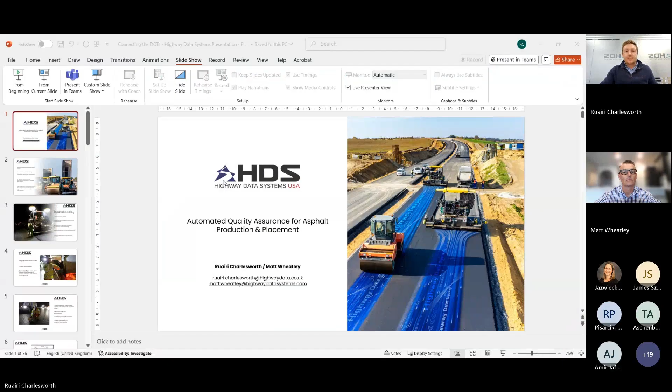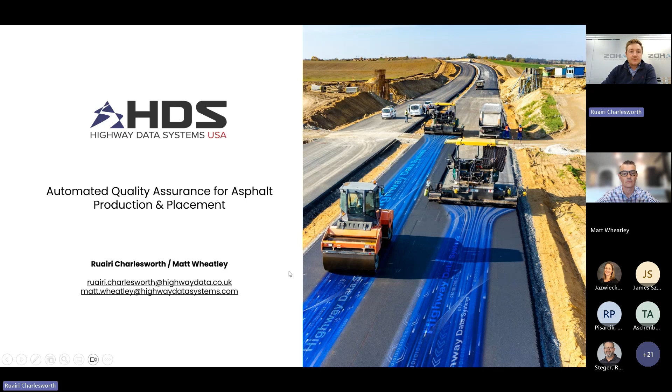The company that I work for, Highway Data Systems, we're going to be talking about automated quality assurance for asphalt production and placement. So first of all, just a little bit of background about us. As you can probably tell, I am not an American. We started up in the UK, where we are a UKAS accredited materials testing house. What that means is UK accreditation service. So we are all from a technical materials testing background. I myself started off as a technician when I was about 18. I've been in the lab, I've been out on site. I'm quite pleased to say that now I spend most of my time in an office, so it's a bit cleaner. But the background really is materials testing.

So rather than being a technology company that's come into the industry and trying to apply technological solutions to the industry, we're very much from the industry and have identified ways to use technology to improve processes. So we operate our hardware and software that we design in-house as a service for contractors. And we have 46 squads and 16 plants. I think actually that number might be a little bit out of date. Matt will probably explain to you how many we've got going in the US, but operating with our technology across the UK, Ireland, and the USA. And we are the sole provider of this technology on frameworks, including Transport Scotland, National Highways, and Europe's biggest airport, which is Heathrow Airport.

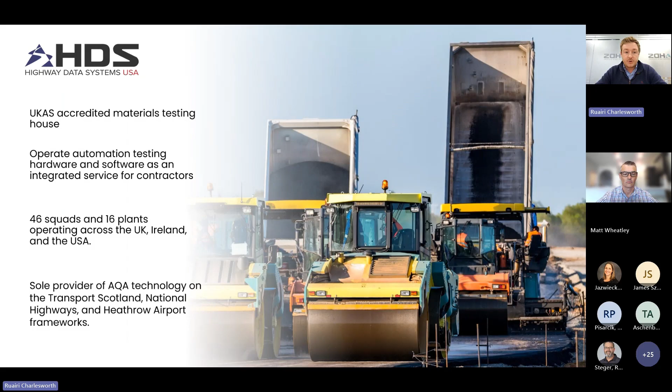So here are some of the issues that we identified as requiring improvement in the asphalt construction industry. The first is health and safety. There are many and significant health and safety risks with doing anything on site, as we all know, and any opportunity to use technology to avoid that is a pretty self-evident benefit. From a technical point of view, we think that because of the way that quality assurance is done, it's often done after construction, and that means that there's a limited opportunity to fix problems before they become permanent. I'll get on to talking about compaction testing in a minute, but that's a pretty good example. And anybody who's worked in the industry for any amount of time will know that there is often a limited degree of communication between asphalt production parts of the business and asphalt contracting, and that causes issues. And it has negative impacts on quality assurance. So we really thought that was a good area to look at for improvement.

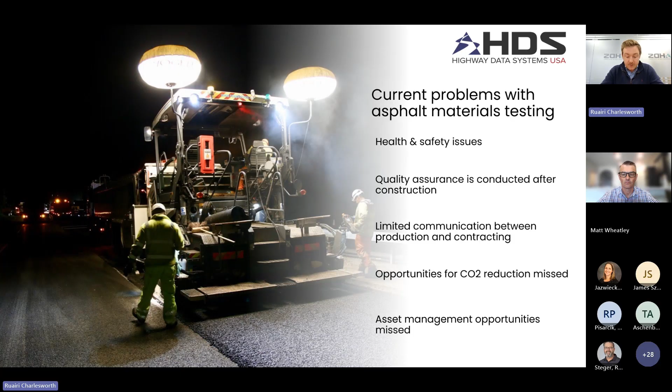Next, opportunities for CO2 reduction. It's a very important topic. Everyone across the industry is trying to do everything they can, but there are some opportunities being missed by the lack of sophisticated technology being used during particularly the asphalt production process. And then finally, one of the issues that we identified is that none of the data that we use in construction quality assurance tends to be used during asset management. And we think that it stands to reason that if you know more about how the road is constructed, it should help improve your understanding of how the road will perform during its life cycle. So those are some background things that we wanted to try and improve on. In some more detail, this happens on networks around the world day in, day out, and it's capturing material delivery temperatures.

If you're sticking your hand into very hot asphalt around moving machinery, not only are you likely to be capturing only a couple of data points, maybe the material will tend to be cooler at the back of the truck, but you're putting yourself into danger.

And if you think about all of the operations that technicians have to do around the paver, whether it's rolling temperatures behind the back of the paver, mat temperatures, delivery temperatures, creating construction records based off ticket information, it's actually quite difficult for that technician to keep up and record all that information diligently and accurately. So we think there's some opportunities for improvement around those processes.

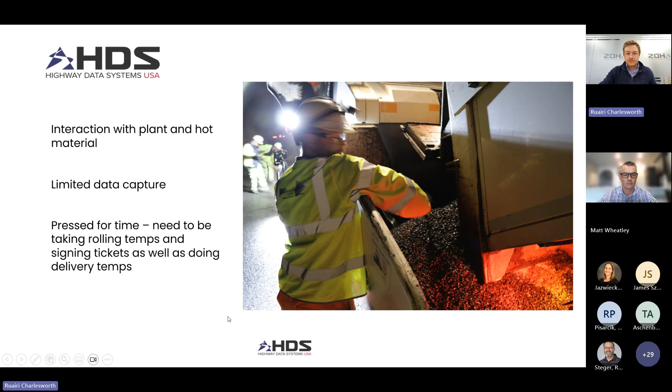Secondly, compaction testing. So first of all, I've got to say that we don't think that density gauges are especially reliable. We've done a fair amount of correlation work, and we think that they are more affected by things like temperature than may often be acknowledged.

But from a practical point of view, this is normally done after the construction's finished. The guy drops back after laying X number of tons of base or binder, and the material is going to have cooled significantly by the point at which the testing's done. And that means if you find that some of the material is out of spec, then unlucky really, because there's not much you can do about it at that point.

The accuracy of density correlations is variable. I think particularly with increasing amounts of RAP going into mixes, we think that basically there's opportunity for doing compaction testing in a better way, basically through the use of technology.

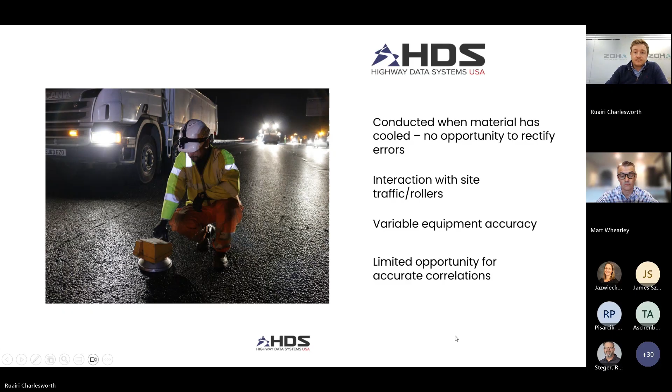And finally, the data. The way that we collect quality assurance data at the moment is pretty old-fashioned. It means that the resulting reports that you get out of it tend to be siloed. There's not much opportunity for doing big data analysis. They don't tell you much about the project progression, and they tend to be chainage referenced, which means that the data doesn't upload nicely into GIS visualization platforms.

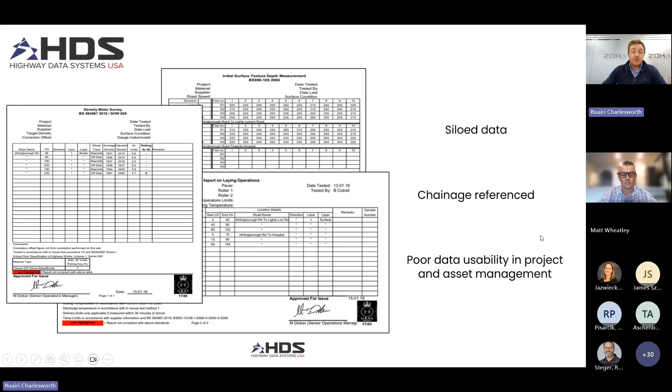So I'm sure I'm not telling you anything that you don't know already, but it's just good to start off by explaining what problems we're trying to overcome with our approach to quality assurance.

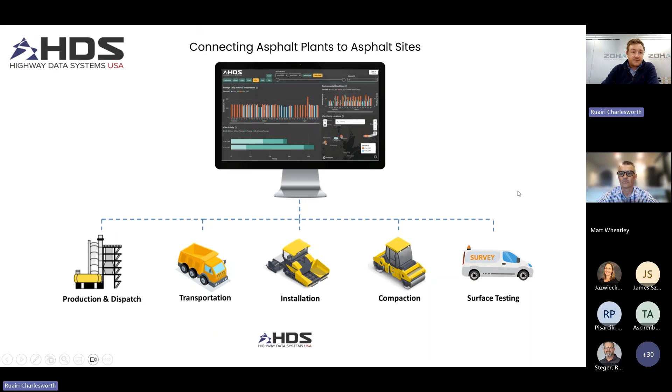And the next couple of slides and the technologies that I'm going to show you have been developed in conjunction with different stakeholders here in Texas in response to their industry needs and requests. And maybe before we get into it, a good analogy for these technologies is how behavior changed within your organization if and when you introduced dash cams to your company's vehicles, because it's a similar effect. When there is visibility of data, behavior may and often does change.

But the first thing we're going to look at is what we term our e-plant system. And as you can see, this is a real install at a plant in Texas. We have an infrared sensor that records material at the drag slat as material is produced. It measures the temperature as the material leaves the drum before it is transported to the storage silos. And we use cellular or Starlink to send the data off site, and the operator is provided with a tablet in his or her control room to view live data of the temperature of the material they're making. Go to the next slide, please, Ruairi.

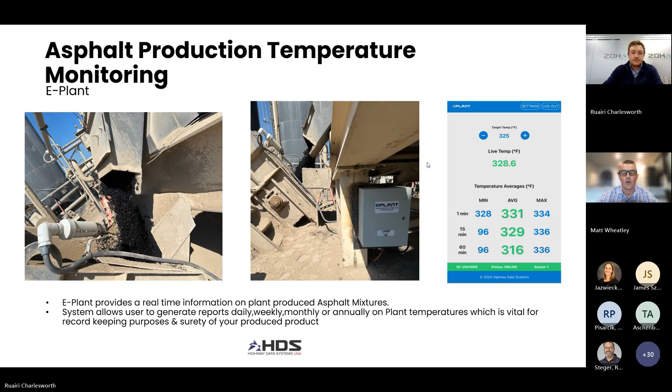The next technology that we developed, again in conjunction with industry, was what we term our e-silo system, where we mount infrared sensors underneath the eaves of the silos. As the silo door opens and material is released, we capture the temperature of the material. We then tie that to the loadout ticket and report this information in real time for the plant operators and owners.

We also store this data in case of emergency. And the slide that you're seeing here, the red circles are the infrared sensors that are underneath the eaves of the silos. And as you can see, our control box is magnetically mounted, and the silo sensors are fed to this box. And again, we use either cellular or Starlink to send the information off of site.

Could I have the next slide, please, Rory?

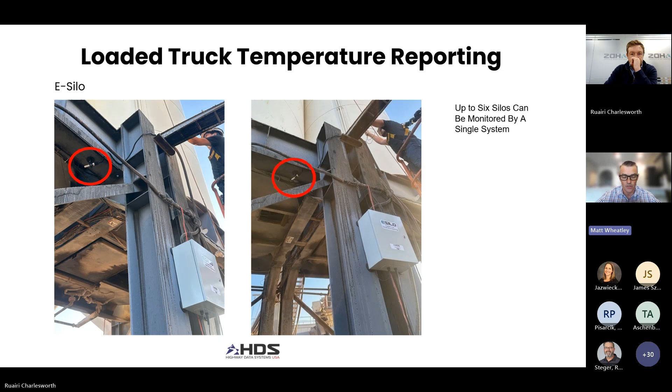So here you can see a truck is leaving the plant. And as you can see, the operator has a live tablet showing them that truck loadout with the temperature of the material. And therefore, they can ensure that the material that they're shipping is within specification. We like to call this encouraging positive client relations. In other words, for the contractor or the producer of the material, they can prove the load that they loaded, the temperature and the time that they loaded that material, and can settle disputes.

We can look at the next slide, please, Rory.

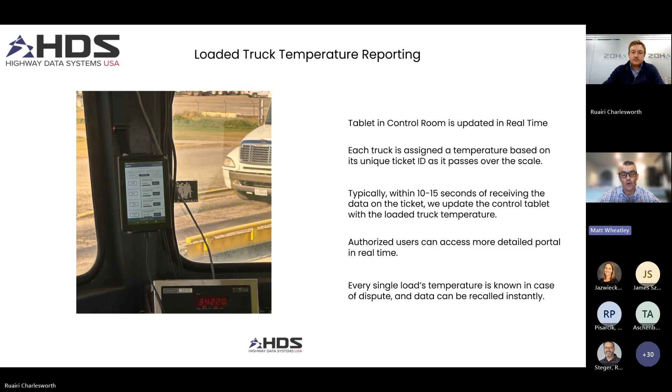And we show this data in a couple of different ways. So the image that you're seeing on the left is a more traditional tablet view, where you can see the truck information, the type of material, the tonnage, depart time, and the temperature of that material as it was loaded. But on the right-hand side, and the reason I show you this is I can't really explain this, but plant operators prefer this view, which is the last drop they're making out of a silo into a truck. And we're not really sure why, but it seems to give them that comfort that that immediate drop they just made was within tolerance.

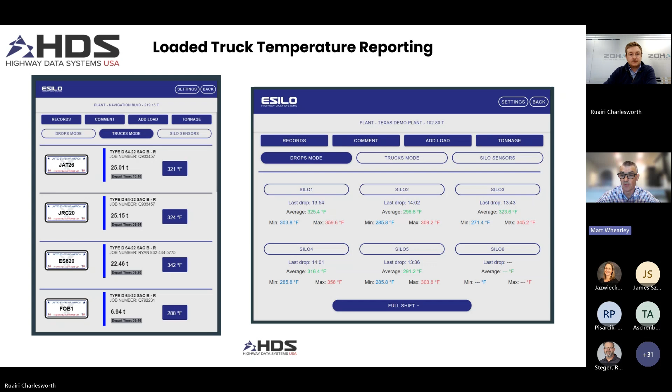So we're now capturing production information in terms of what the material was made at, and we can now also see what the loadout temperature is going into the back of a truck. So this data is then transmitted to the paving crew, and Rory is going to show you some of the technology at the paving crew and how we collect that data.

Thanks, Matt. Yeah, so this screen is what we use for creating laying records. It's a pretty simple system. Basically, when material goes over the weighbridge and a ticket is created, the HDS system receives the information from the asphalt producer, and we send it ahead to site. So this is a tablet screen basically on the side of the paver.

When the material gets to the site and when it's discharged, the banksman or the dump man, as I think they're called over there, will press this vehicle registration button. That drops a GPS point around which all of the temperature information and all of the ticket information is then associated. So we have a GPS record for where every load of material has gone on site. It removes the requirement for having somebody standing down scribbling information, it digitizes it, and it creates a geospatial record as well.

A couple of things worth mentioning on this is that we have a depart time. So anybody who's had the fun experience of phoning an asphalt plant and asking where their material is, you'll normally get told that it's on the way, even if it isn't. And what we find is the guys on site quite like to know when it actually has left. So apart from just being a nice to have, there's actually a technical benefit, in that the guys on site can regularize the speed of their paving, and that helps to reduce thermal segregation.

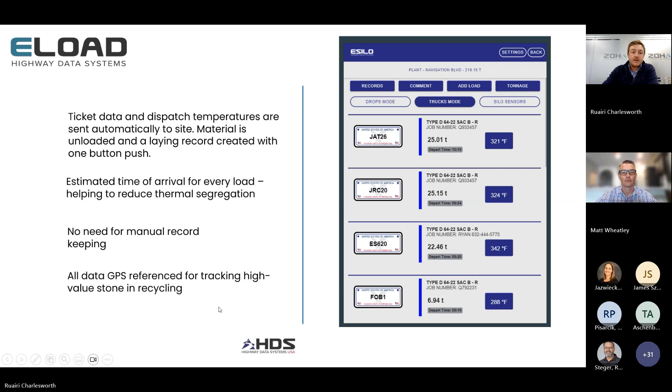We also instrument pavers with a system we've called ETEC. ETEC consists of a GPS on the roof of the paver for tracking the movement of the paver, an environmental monitoring system for capturing environmental information, and two infrared temperature sensors which we point at the augers.

The reason why we point the infrared temperature sensors at the augers is because when you're using infrared to measure asphalt, you want to have the asphalt moving if at all possible, because as we know, the top layer of asphalt, as soon as it's exposed to air, will tend to be quite a bit cooler than it will be in the middle.

And we also think that by the time it's been mixed through the flights and by the augers, you're going to have a more representative temperature. So we continuously monitor the temperature of the asphalt, and using the GPS and the time stamping, we match up those temperatures to the e-load tablet, and we have a delivery temperature for the asphalt without the requirement for any manual testing.

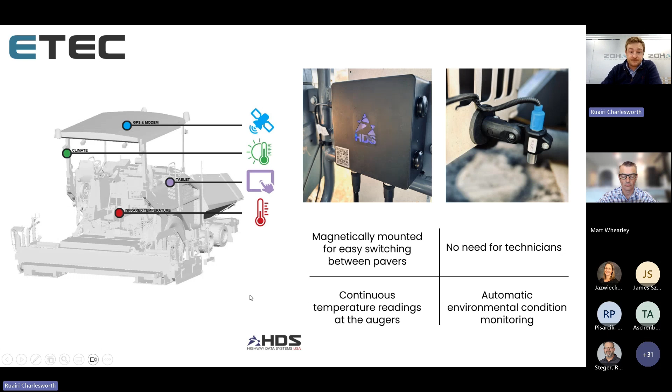You'll have to forgive me for showing degrees Celsius here, but we do have it in Fahrenheit, I promise. This is so that the guys on site can have access to the information. So we have the delivery temperatures as well as some averages and the environmental information as well. That's all available through the ETEC app, which we have on the tablet there.

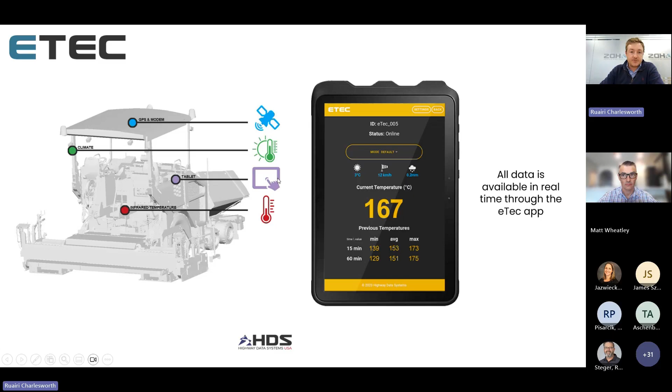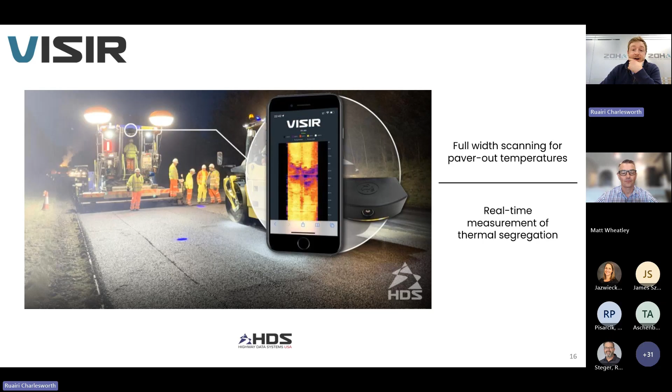The next system that we employ, and I think this is reasonably well used in the USA, it's becoming more popular in the UK as well, is a backwards facing thermal imaging camera, and it's used for measuring thermal segregation. So what you'll see on a readout here, this is an example of basically pretty bad thermal segregation. The purple lines here, these are paver stops. This is where the material has been cooling under the screed of the paver.

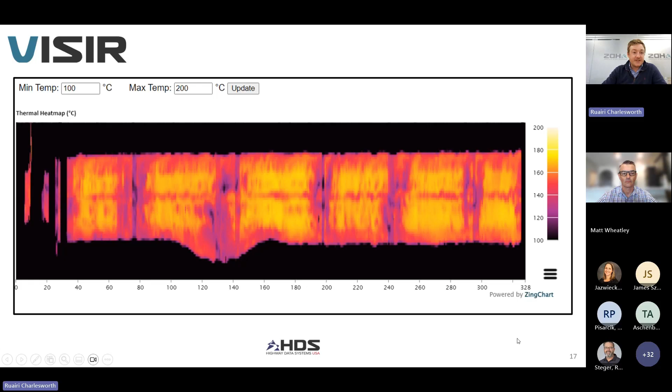So it shows the importance of having not only measures in place to reduce instances of thermal segregation, but also how important it is to capture that information to make sure that, well, the contractors are performing as well as they should be, and I'm sure they would like to be.

So yeah, this system we've had it specified by Transport Scotland, and it's quite interesting looking at the difference between the USA data and the UK data. I think it's fair to say that the USA data tends to be quite a bit better than it does over here. You've got more space on your roads, and I think investments in shuttle buggies and material transfer vehicles on USA construction sites really does help to improve the quality of thermal segregation. So it's really great to see that over there.

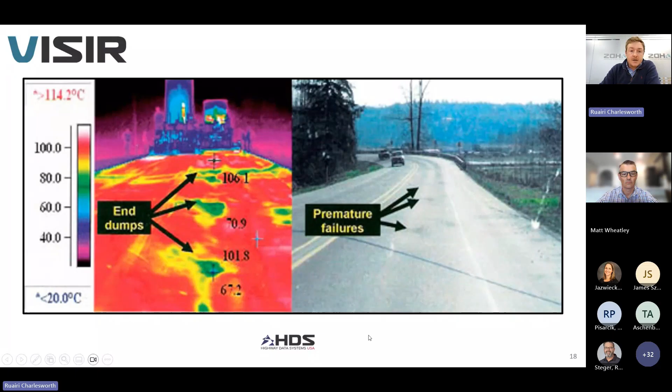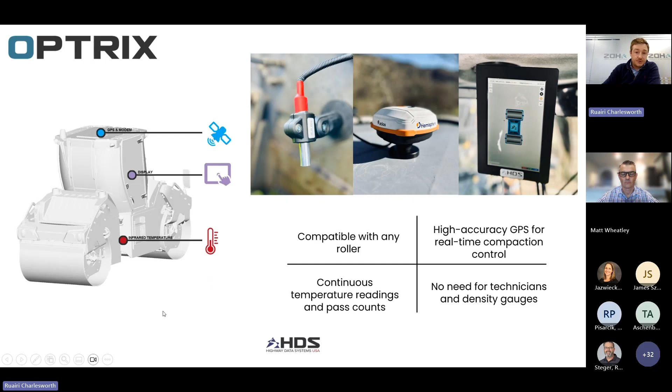The next system that we employ is a system called Optrix. And Optrix monitors roller movements as well as infrared, has an infrared system for capturing rolling temperatures. So as you can see from this, we have a GPS sensor on top of the roof. We used RTK correction to give an accuracy of up to 2 centimeters. So it's a highly accurate GPS system. The infrared temperature sensor continuously captures the rolling temperatures of the material, and we feed all that information back to the roller driver via a visual aid inside the cab.

Now, the way that we use this for doing compaction monitoring is through the use of correlations. So we're just at the moment writing a specification for the use of this system at Heathrow Airport. We're working with AECOM, and basically the way that we do this is through a trial panel and with sacrificial material. So we'll build a compaction curve demonstrating the number of passes required to achieve your desired compaction, and then we plug that data back into the roller system, set the color to be green when it goes over the desired number of passes, and then we tell the roller drivers, go and roll it all until it's green, which is nice and easy to understand.

It's worth mentioning that this does not rely on stiffness measurements. I know there are some roller systems out there which try to use stiffness for capturing density information. We don't believe that those systems are reliable, because you can have a cold material that's gone stiff. It doesn't necessarily mean that it's dense. And basically using stiffness is a complicating factor too far, really. We think method compaction is perfectly reliable. If you have a homogeneous mix and a set weight of roller and a consistent thickness and the right temperature, you will be able to predict the compaction of the material.

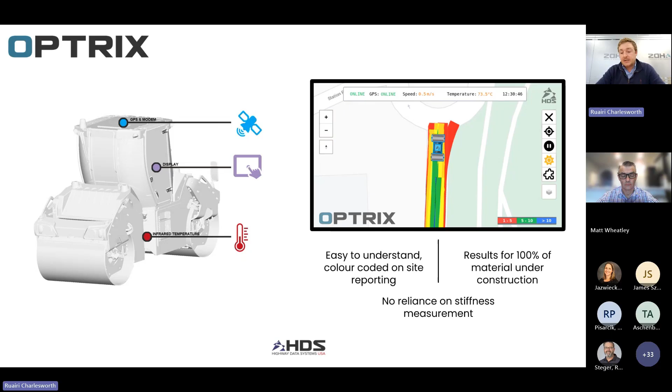So all of the rollers on site are connected with this system. All the roller drivers have full visibility over each other's operations, and in theory you should leave with a nicely compacted road with a very clear output for compliance checking.

The final thing to mention on the technology hardware side is laser surveying. We do this in the UK. We are yet to do it in the US. Not sure what your thoughts are on that, Matt, but we'll get to that later, maybe.

So currently, we use laser systems that we developed ourselves for capturing surface macro texture and a measure of surface regularity, which is called the rolling straight edge in the UK. But basically, we send the vehicles around within a week of construction, and we capture the surface macro texture, which is a safety critical component in the UK. And then the smoothness with the lasers as well.

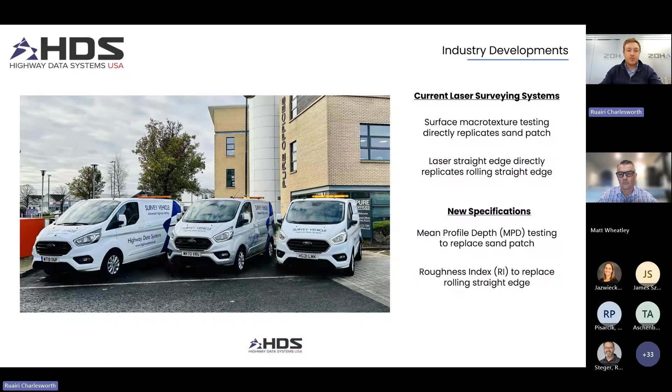And we've actually developed some new lasers which can do quite a bit more. So, you know, MPD testing, SMTD, roughness index, and what have you. So at this point, I'll hand back over to you, Matt, to talk about some of the outputs.

Awesome. Thank you, Ruairi. So as Ruairi's just shown you, we have lots and lots of ways of gathering huge amounts of data. But then the challenge becomes, well, what do you do with that data? Well, we have built a gateway, which we call our HDS gateway, and it's a dynamic platform for managing QA data across multiple shifts, schemes, and data sets. It brings together all materials testing information into one location. Contractors can produce reports, interrogate individual data sets, and track productivity trends across multiple schemes.

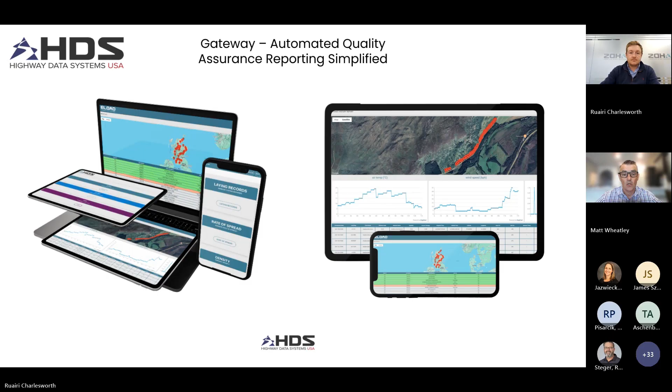Go to the next slide, please, Ruairi. And we only grant access to authorized users. So we provide you with secure login and username details so that only authorized users can gain access to this data. Go to the next slide, please, Ruairi.

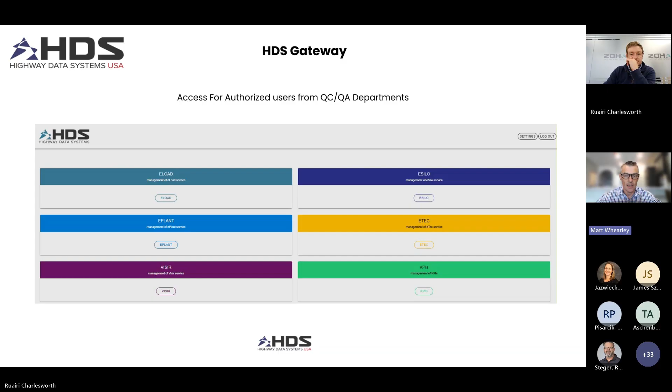And this may be more relevant for the contracting community. However, what we've determined is that a series of these data points can produce critical KPIs, which can show you how much material your plant is producing, but it also allows operational maintenance decisions to be made based on usage characteristics. And a great example of this is a series of producers didn't realize that they were consistently relying on specific silos at specific plants, and now they share the workload amongst the storage silos.

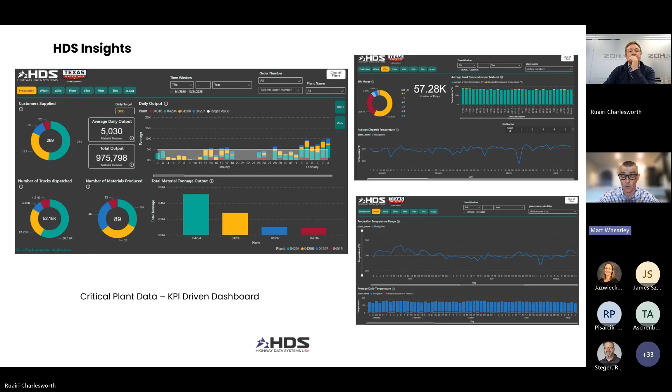So you can gather huge amounts of information from this data over a period of time if you start to build up various plants, what temperatures they're making materials at, and you can track that across all of your different production facilities. Get the next slide, please.

So that's great for a 30,000 foot view, but now I'm going to dig down into some more project specific data. So the next couple of slides that we're going to show you are from some data collected from a project in Oklahoma. This data was part of a climate challenge project carried out by Oklahoma State University by Professor Deb Mishra and his talented team. Both hot mix and warm mix data is presented from different consecutive days' efforts.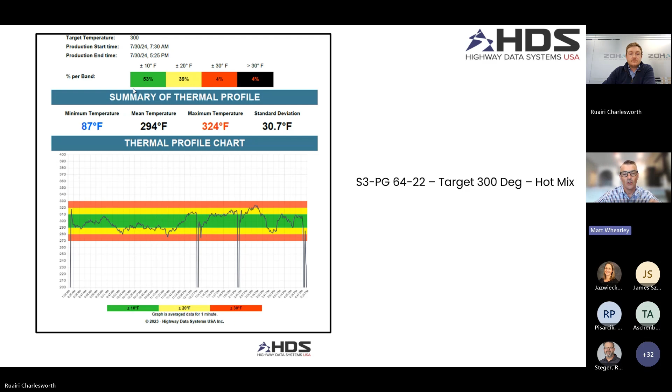So this is now the matrix of that same material being delivered by each truck, the delivery at the paver temperature, the rolling temperatures, and the GPS location of each individual load from that first day. So you've now got a complete holistic overview of the temperature it was made at, the temperature it was loaded out at, the temperature it arrived at the paver, and the temperature it was rolled at.

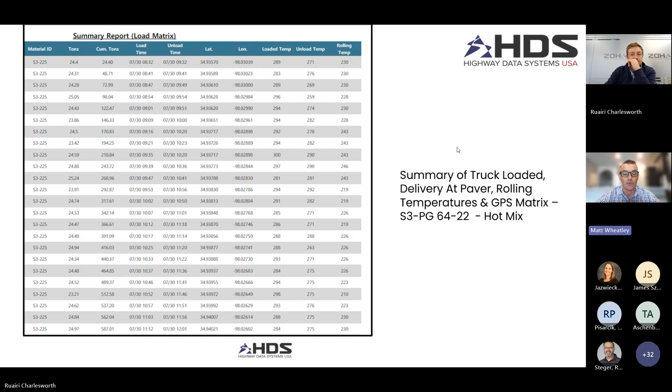Get the next slide, please, Ruairi. Going to look at the warm mix now from the same project, but the next day. So we're now looking at the temperature at day 2. Same material, S3 PG6422, but with a warm mix additive, and now with a production target of 250 degrees. And this was on July 31st.

And again, I'm not a plant operator, but I'm told this temperature increase that you see at the start is very common practice when using warm mix additives, that they'll have the plant running a little bit warmer until they're comfortable, and then they'll drop it down into the temperature range that they're looking to produce at. And again, as you can see, on a mean temperature, the folks did a pretty good job. 255 was their mean temperature. So they did a pretty good job of keeping this in spec.

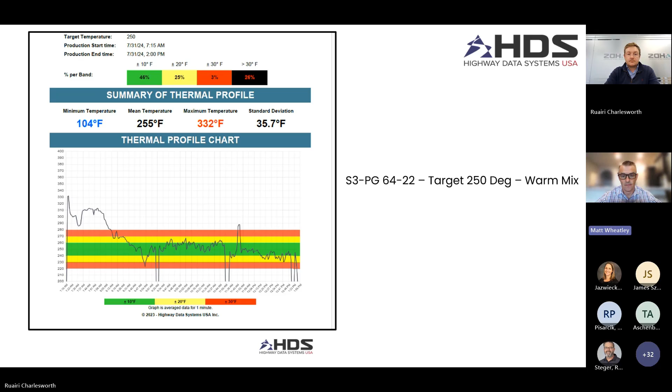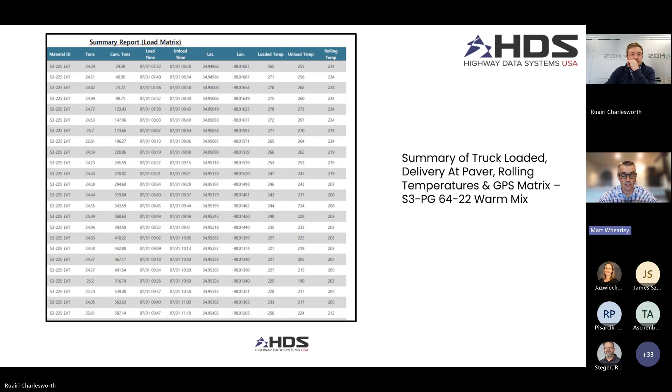Could we look at the next slide, please, Ruairi. And again, now it's the same matrix that you saw earlier for the hot mix, but exactly the same principle. You're now seeing the truck loaded temperature, delivery at paver, rolling temperature, and GPS location of each load. So we go on to the next slide, please, Ruairi.

And we are not doing this live for a reason. We've watched Meta do demos that spectacularly fail when they rely on the internet. So we have deliberately used screenshots for the purpose of this.

However, imagine this is an online portal, because it is an online portal. And now you can see this is the data from those two matrices that you just saw. This is each individual truck and its location plotted on the location where it was actually deployed. And if I was online and live, I could click on one of these and it would show me the ticket number, the temperature, and so on. Get the next slide, please.

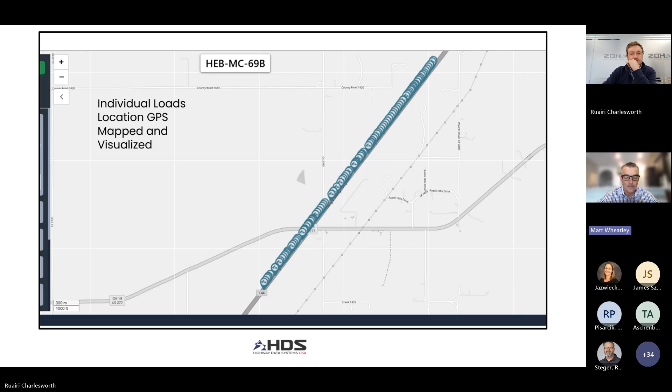And again, in the same location, we can overlay the thermal segregation information. So now we're not looking around for PDFs that may or may not have been sent. Everything is in one location. So everything can be viewed at your fingertips, very, very quickly. And if we could have a look at the next slide, please, Ruairi.

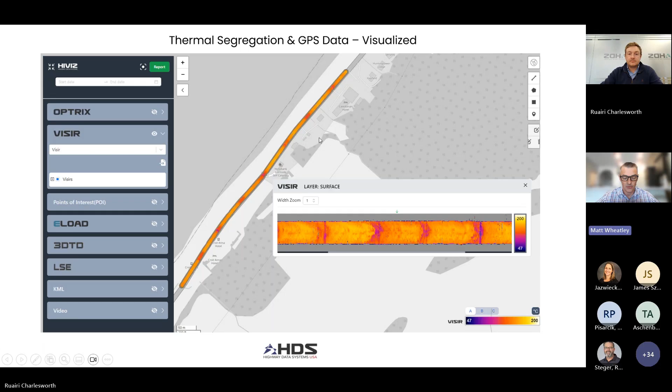And now you can see, as Ruairi mentioned, the rolling patterns. What you're seeing here is that if you're in Texas and your inspector says the rolling pattern is 10 passes, then each roller is programmed, and this is the data that you see, and you can come in and inspect it, zooming in and out to your heart's content. This is showing the passes, but we can also look at the temperature of the rollers as they made their first passes as well. So all the data is stored in one central location for ease of access. Can we get the next slide, please?

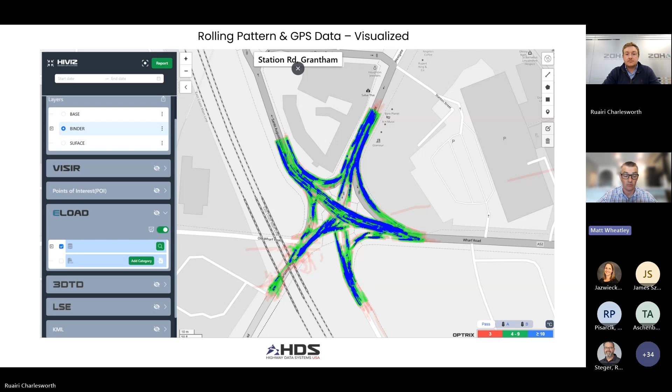So, developments in Texas and beyond. We're based in Texas, so we now have installs of over 30 different systems, both plant and silo systems, in Texas. The development of these critical KPIs is without question driving a really deep understanding of plant production and operational parameters for the owners. The adoption rate that we're seeing is significant. What I'm driving at is that contractors are willing to do this for their own purpose because it's a CYA. It's information they didn't have previously, and it's proving very valuable to them commercially.

So we are involved in development of standards in Texas, and I'll talk about that in a moment. But also, as Ruairi mentioned, we're working with a leading UK consultant to develop a standard for Heathrow Airport. And we're also working with the ASTM D04 committee to make a draft submittal in early '26. TxDOT is leading the way, and I'm not meaning to be rude to other states, but TxDOT seems to be leading the way in incentivizing producers to use warm mix and lower temperatures. And if you get the next slide, please.

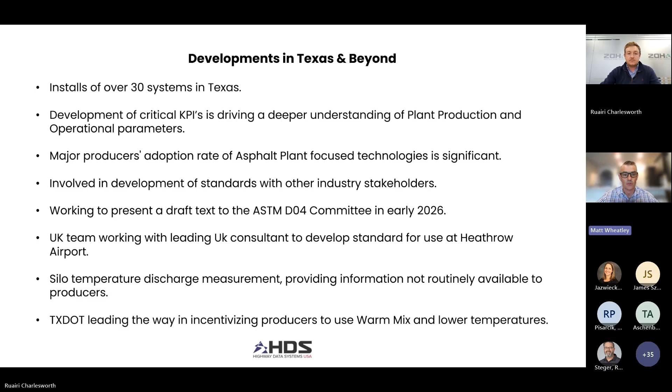Subsequently, we're working with the Austin district, and we've gone back and are working on developing written specifications for a dense grade mix and a thin overlays mix, which are both widely used in the Austin district. However, this new standard is now measuring the temperature of the material as it is loaded into the truck from the silo system. And because of that, and because many of the producers are already using this system for their own purposes, we anticipate that this one-time use specification is likely to be approved.

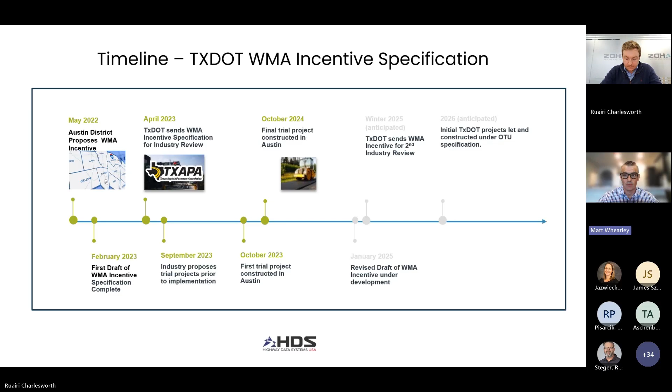And we get the next slide. This is just a quick summary of that standard that's under consideration right now. And that's a quick summary of some of the work we've done here in Texas. We've only been going 2.5 years here in Texas, so we've been really thrilled with industry's response and the help and guidance they've given us.